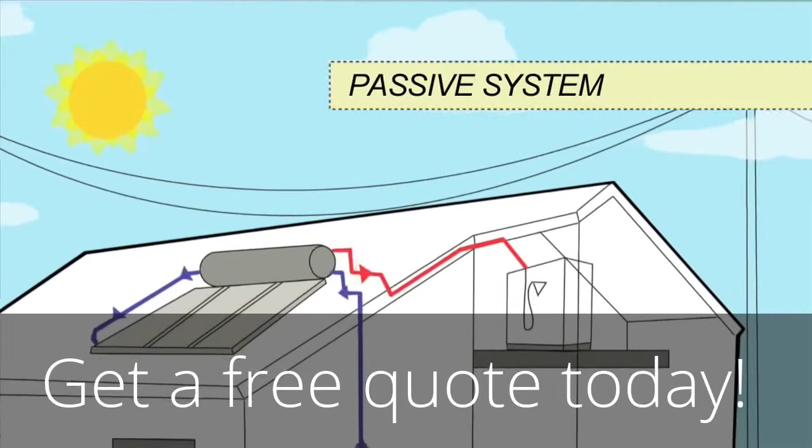In passive systems, also known as thermosiphon systems, the tank sits above the collectors. Colder water sinks into the collectors, whilst warmer water rises unassisted from the collectors into the tank. The tank may sit on the roof with the collector, a close coupled system, or within the roof cavity above the collector, a gravity feed system. With these systems, the roof support structures must be strong enough to handle weights of up to 800 kilograms.

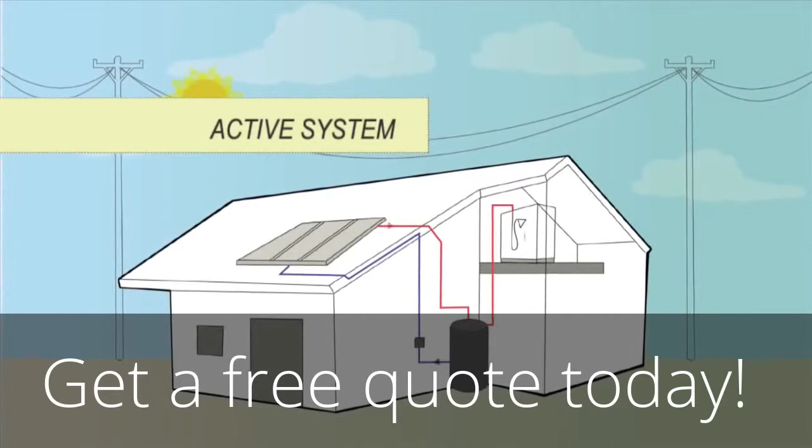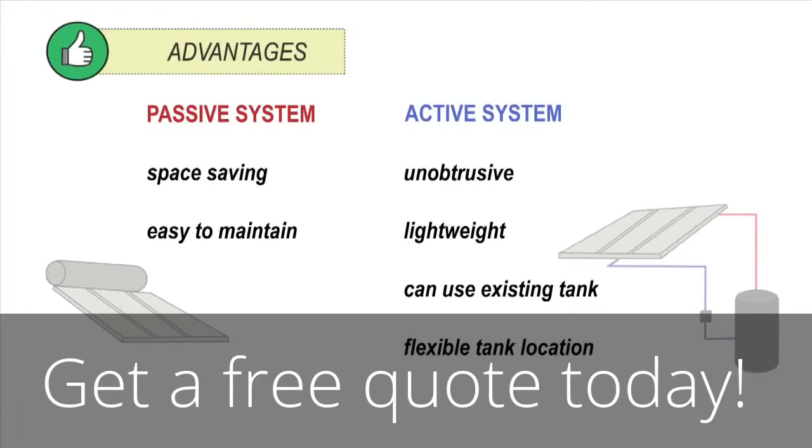Active systems use a small pump to move water between the collectors and the tank. The location of the tank can be within the roof or on the ground. Each type of system has advantages. A passive system is space-saving and is easy to maintain with no moving parts. An active system is unobtrusive, lightweight, can use an existing tank, and the tank can be located closer to where hot water is used, reducing heating loss in pipes, but the pump uses some energy.

There are two collector types to choose from: flat plate and evacuated tubes. Evacuated tubes have the advantage of receiving perpendicular radiation for a greater part of the day. This, combined with their vacuum insulation, means good winter performance. Flat plate collectors, particularly if purchased as part of a close coupled system, can be more affordable than evacuated tube collectors. However, the prices of evacuated tubes have fallen in recent years.

Collectors should ideally face true north in a shade-free position. Facing the collectors 45 degrees from the north will result in only minor reductions in performance. The ideal inclination is the angle of latitude plus 5 to 10 degrees. Sydney's latitude is 33.5 degrees, so an ideal angle of inclination would be around 40. However, plus or minus 15 degrees would still provide adequate performance.

If your collectors face due east or west, the lower the angle of inclination, the better. However, to allow thermosiphon flow, you must always keep the angle above 10 degrees. For the correct sizing of your collectors and tank, consult manufacturer's guidelines to see what is best for the climate and household.

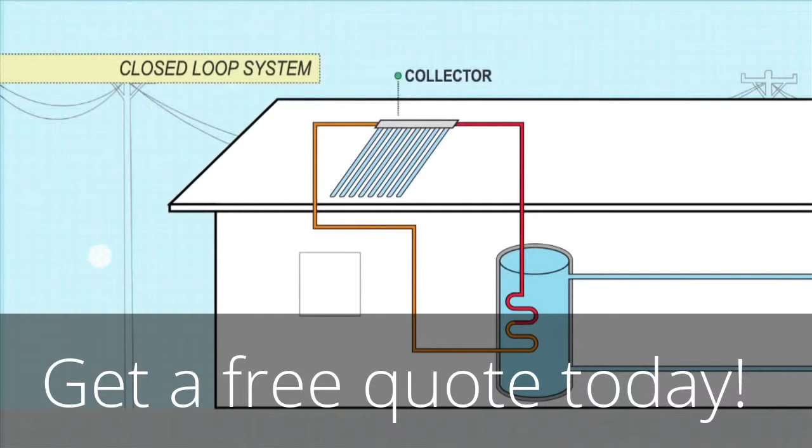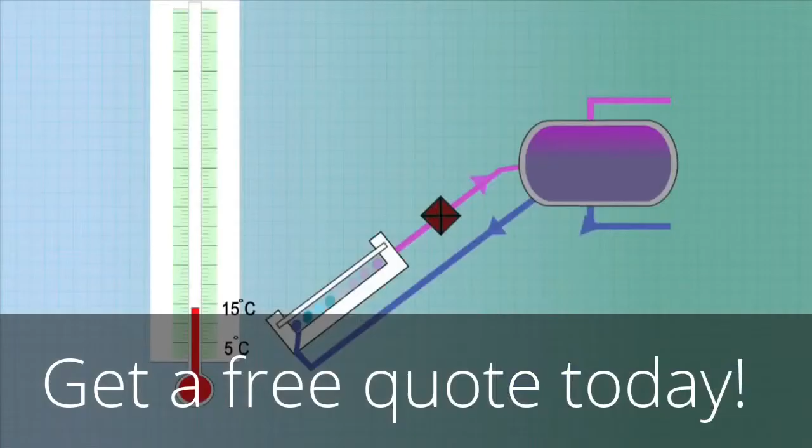In places with minor frosts, evacuated tubes may offer enough inbuilt protection. In climates with regular frosts, indirect or closed-loop systems are the most popular and reliable form of frost protection. Instead of water, an antifreeze fluid is heated in the collectors. The antifreeze passes heat onto the water via a heat exchanger. The antifreeze does not come into contact with the household water supply. Other frost protection methods are available, such as frost protection valves, temperature programmable pumps, and drainback systems.

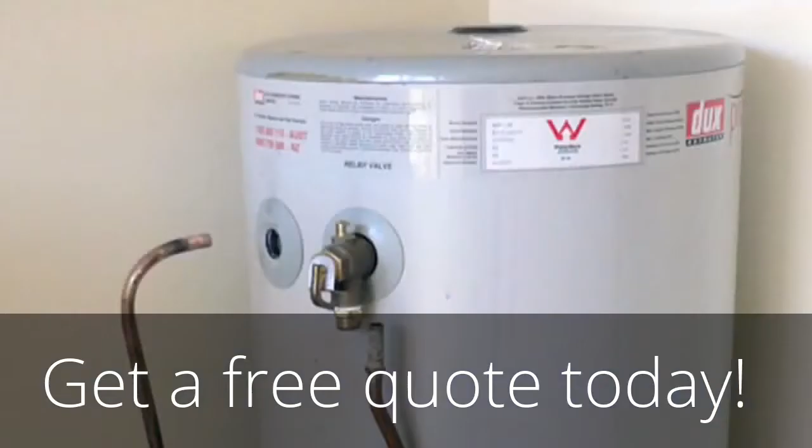In an Australian summer, water in collectors can easily approach boiling point. This can cause excessive pressure buildup and can damage the lining of vitreous enamel tanks. The Australian standards state that solar hot water systems must provide over-temperature protection without draining water, so a temperature pressure relief valve is not enough.

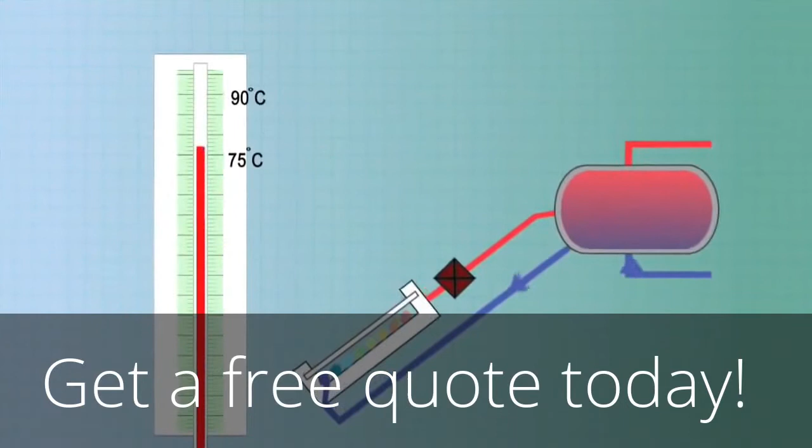The most common way to prevent overheating in the tank is by automatically stopping the circulation between collector and tank when the tank water gets too hot. This can be done using a solar control valve or a temperature-controlled pump. See the fact sheet on the Trade Secrets website for more information about how to control for frost and overheating.

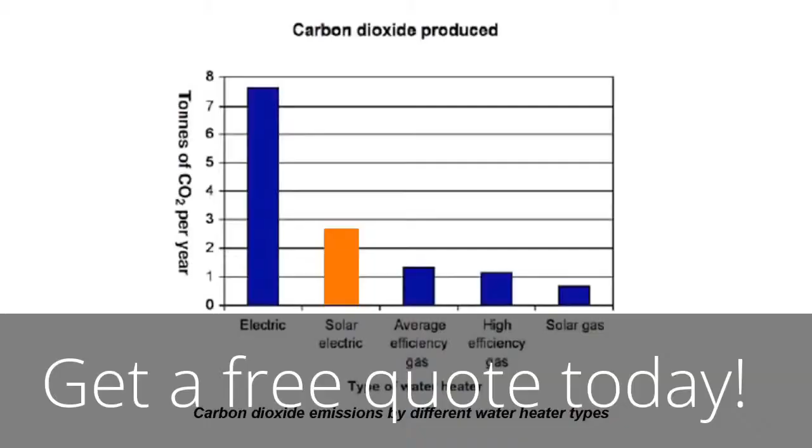The solar hot water system will require boosting at some times of the year. Electric boosters use a lot of power, so make sure the booster is controlled by a manual in-house switch. This switch should include a light to indicate when on. Boosters which have no in-house switch or are permanently on are wasteful, as they often heat water to 60 degrees, water which would otherwise be heated by the sun.

When advising the householder on their energy tariff options, explain the pros and cons of each option. A regular tariff allows boosting at any time, but it won't lead to a reduction in their bills if their previous system was electric off-peak. Off-peak will be cheaper, but may not fit the hot water usage patterns of all households. If available, extended off-peak or off-peak 2 is often a good compromise.

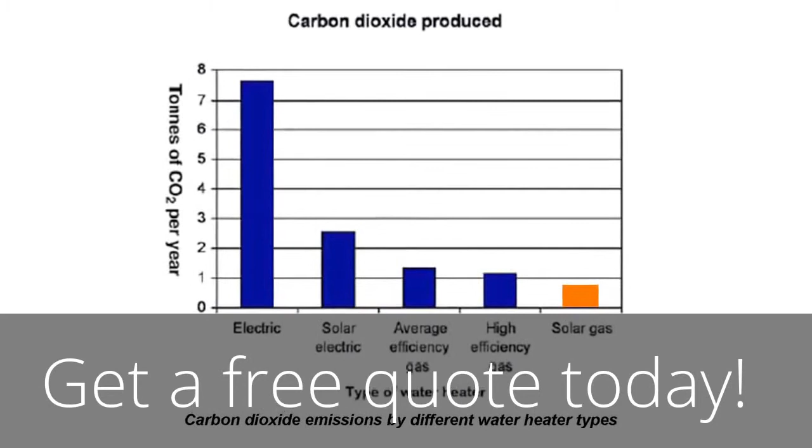Natural gas boosters have the advantage of lower emissions and running costs compared to electric boosters, and also aren't subject to time of use restrictions. Install a timer on gas storage boosters to ensure the gas does not heat water which would otherwise be heated by the sun.

So, select the system for the climate and use appropriate temperature controls, locate the collector and tank to maximise performance, install a manual boost switch, and connect to a tariff which minimises emissions and costs.